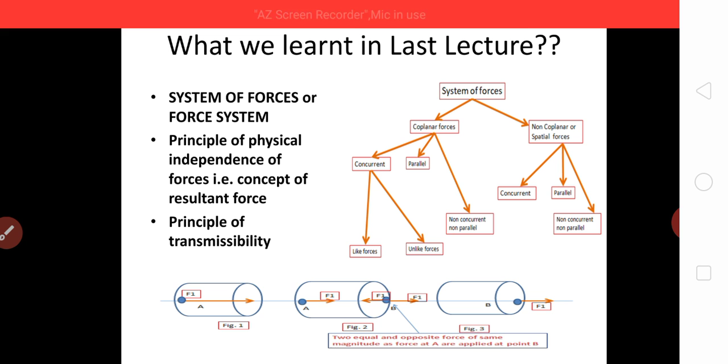Here the principle of transmissibility explains it as below: a force F1 is acting at point A. We want to change it to point B. We have applied two equal and opposite forces of the same magnitude as that acting at A in figure 2, and we cancelled the two forces, that is the initial F1 force at A and the opposing force F1 at B, and the net force left is F1 at B. So it has changed the position, but without changing its effect on the body.

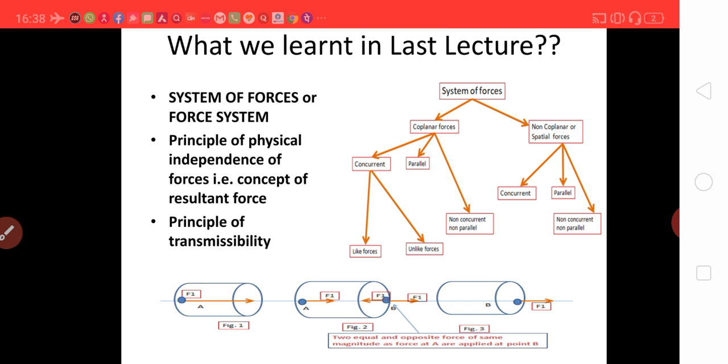Now let us proceed further. That is equilibrium, resultant and equilibrant. These are the three topics I am going to cover in this lecture, and we will take on 2-3 problems on this. But before that, you should understand the parallelogram law of forces, because I will define these three on the basis of this figure only.

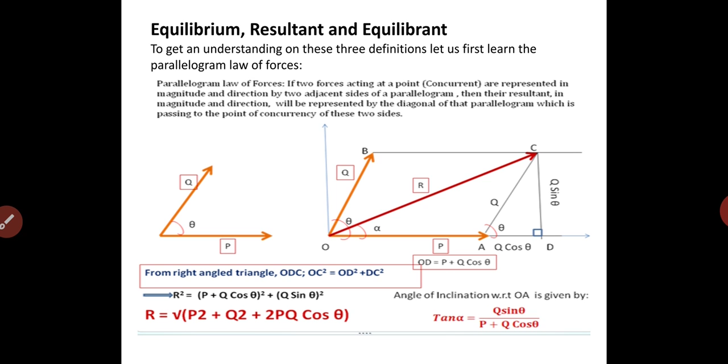Now sign convention: you should know that the horizontal forces will be positive when these are to the right of O, that is from 270 degree to 90 degree, and from 90 to 270, that is toward left, these will be negative. Similarly, vertical forces above O will be positive, from 0 to 180 degree, and these will be negative in the third and fourth quadrant, that is from 180 degree to 360 degree.

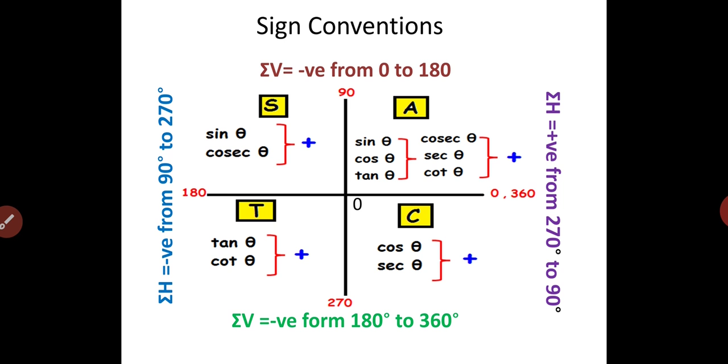Refer to the earlier figure. Now we will define the resultant. Here P and Q are the two coplanar and concurrent forces acting at an angle theta. Those two forces can be replaced by a single force whose effect will be same as that of the two forces together. This single force is called resultant of the two, and is given by R equal to square root of P square plus Q square plus 2PQ cos theta, as we explained in an earlier slide. So I think now the resultant concept is clear.

Now equilibrium. If a body is at rest or in uniform motion under the action of a system of forces, the body is said to be in equilibrium. The necessary and sufficient conditions of equilibrium are: sum of the horizontal forces must be 0, sum of the vertical forces must be 0. And in case of a non-concurrent force system, clockwise moment must be equal to anti-clockwise moment, or summation of moment also must be 0. The equilibrium is of two types, that is static and dynamic.

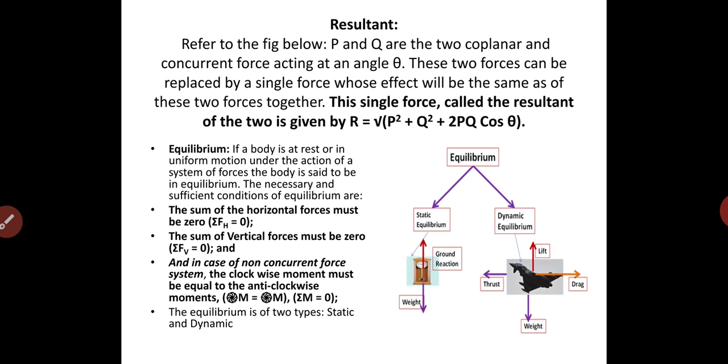Now static equilibrium, again refer to the figure on the last slide. Here there was a clock kept on the ground. It was in static equilibrium under the action of the weight of the clock acting downwards and the ground reaction acting upward. Similarly, take the example of this ladder shown in the figure. It is kept against a wall and is under equilibrium under the action of floor reaction, wall reaction, frictional force at the ground, frictional force at the wall end at B, and the weight of the ladder.

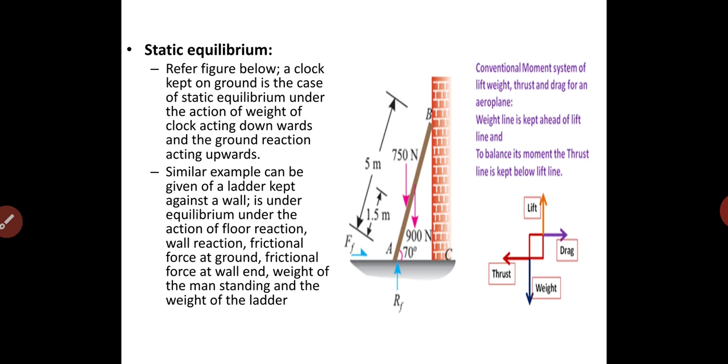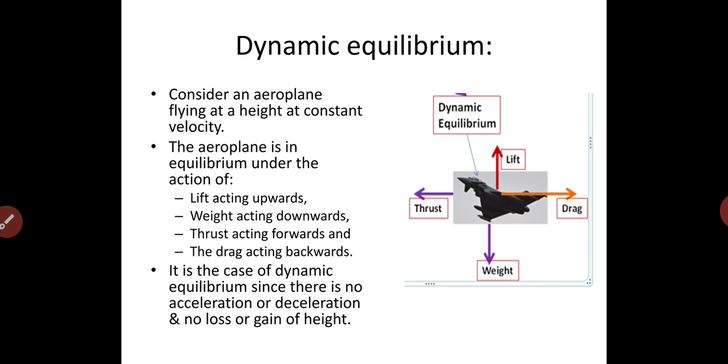Consider an aeroplane flying at a height at constant velocity. The aeroplane is in equilibrium under the action of lift acting upward, weight acting downward, thrust acting forward and drag acting backward. It is the case of dynamic equilibrium since there is no acceleration or deceleration and no loss or gain of height.

Now, the conventional moment system of the lift, weight, thrust and drag of an aeroplane. Let us go beyond the syllabus. It is interesting, and you must know all these things, because this is what an engineer should know and recognize. When an aircraft is flying, refer to the figure below. Here you will find that the weight of the aeroplane is ahead of the lift.

So there will be a counterclockwise moment due to lift and weight. So to balance this, thrust is kept below the drag line. Okay, why do we do this? There is a logic behind this.

In case the aircraft engine fails, if we maintain thrust and drag in the same line, and lift and weight also in the same line, then the aeroplane will not have a nose down tendency; it will fall like a stone on the ground. So, in case of engine failure, there should be a nose down tendency of the aircraft, so that it will get velocity, and by that it will get lift. So it can get to a nearby runway and land.

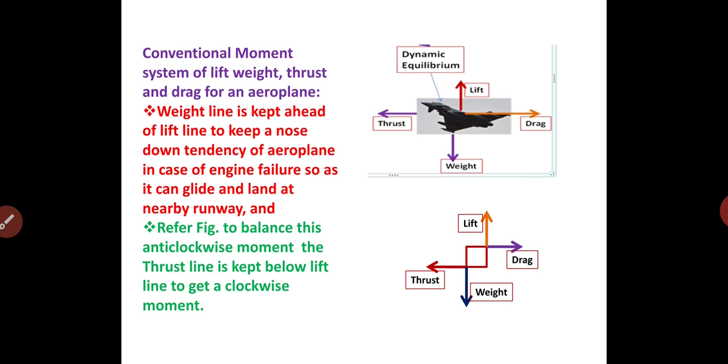So that's why the weight is kept ahead of the lift, and to counterbalance it, the thrust is kept below the lift line. So to balance this anti-clockwise moment, the thrust line is kept below to get the clockwise moment.

Okay. Now equilibrant, a very important concept again, but for that you have to first refer to how we defined the resultant. This is again the parallelogram law of forces figure. Here the resultant is given by under root of P square plus Q square plus 2PQ cos theta.

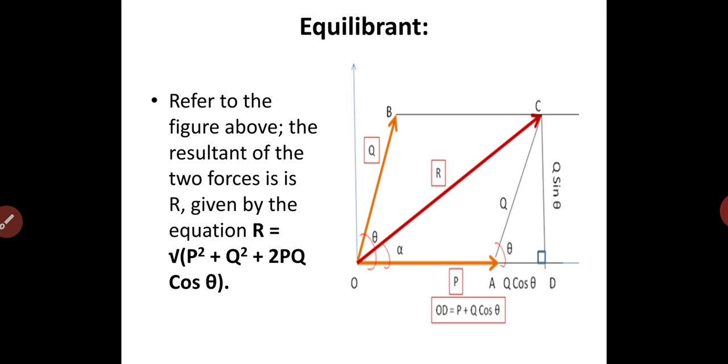Now, as I had told you in the earlier lecture, the equilibrant is the force which is equal to the resultant of the system of forces but opposite in direction. Now, minus R is the equilibrant force. So this equilibrant force will bring this system into equilibrium condition. Here this negative force is the same in magnitude, line of action and point of application as that of R, but in opposite direction; that is called the equilibrant force.

Now here you must know that the point of application need not be the same, but it has to be on the line of action. Since the body is rigid, you can apply a force anywhere on the same line of action. So for this system of forces, the equilibrant will be the force which is equal to the magnitude of their resultant but in opposite direction.

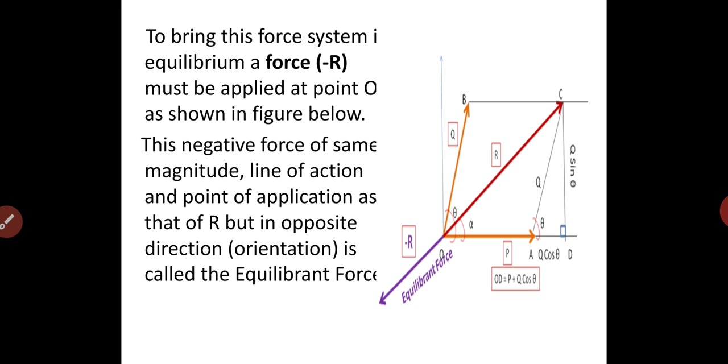Okay. Now next, we will refer to examples. For example 1, two forces of 100 Newton and 150 Newton are acting simultaneously at a point. What will be the resultant of these two forces if the angle between them is 75 degrees? Now, it is very simple. Just first draw a rough sketch, OA and OB at angle theta, with the resultant at alpha. It is a case of a coplanar concurrent force system of two forces. Hence the parallelogram law of forces can be applied here.

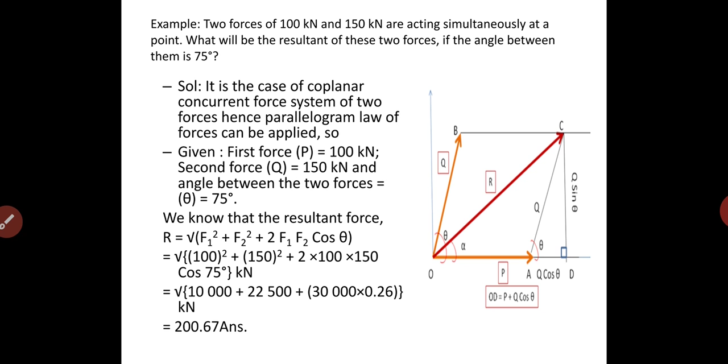Given the two forces, P is 100 Newton, the second force Q is 150 Newton, and the angle between them, theta, is equal to 75 degrees. Apply the parallelogram law of forces: R equals under root of F1 square plus F2 square plus 2 F1 F2 cos theta, that is 100 square plus 150 square plus 2 into 100 into 150 into cos 75 Newton. That comes out to be 200.67 Newton.

Now the angle of inclination with respect to OA is given by tan alpha equal to Q sin theta upon P plus Q cos theta. When we put all the data into this equation, we find alpha equal to tan inverse 1.043, which comes out to be 46.2 degrees. The angle alpha is read with respect to force P, 100 Newton, in the anti-clockwise direction, hence the resultant will lie in the first quadrant.

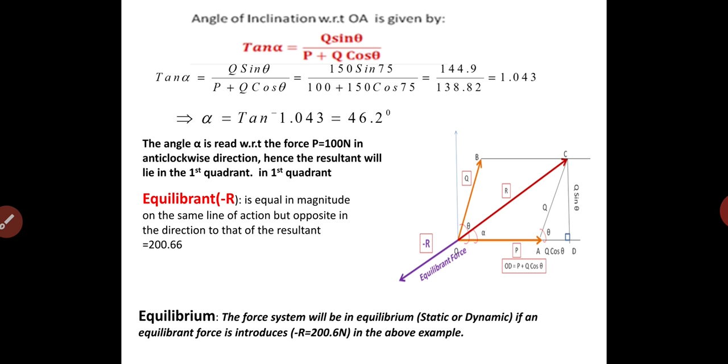Okay, now again let us recapitulate the equilibrant, minus R. This is equal in magnitude, that is 200 Newton, on the same line of action but opposite in direction to that of the resultant, that is 200.66. The forces will be in equilibrium, static or dynamic, if an equilibrant force is introduced, as in the above example we have introduced minus R equal to 200.6 Newton.